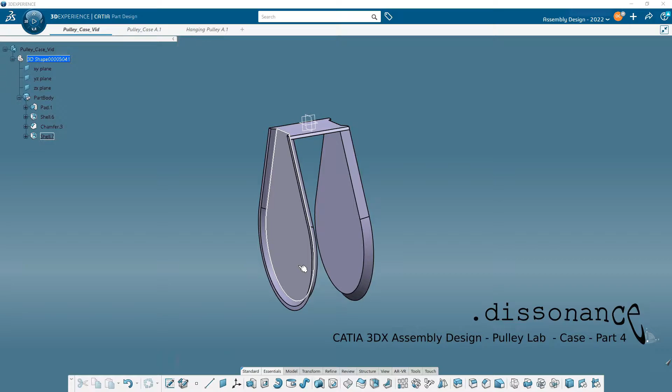So what I'm going to do next is add in our holes, and then I'll add the fillets afterwards. So I made mention of that over here when I was going through the tree. I made the fillets and I noticed it, and I was like, yeah, usually I put those at the end. The reason we usually do this is that you frequently have a lot of edges that you round over. Things in real life are not sharp.

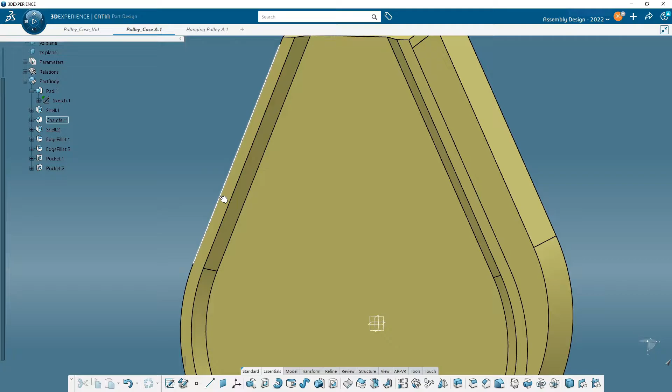So if I wanted to make this look a little bit more realistic, or if I was sending it to a 3D printer and it was a very sharp edge, maybe it wouldn't be so good. So you round over stuff. And because a part of a certain complexity is going to have a lot of different edges, you might end up with a lot of different fillets.

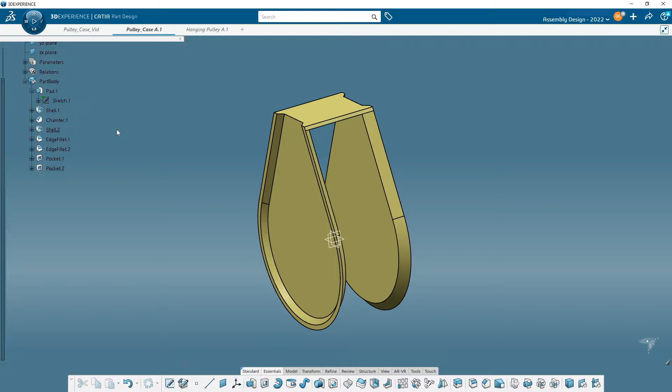And rather than have a pad and then a fillet and then a pocket and then a couple fillets and then something else and some fillets, it's a very common protocol to keep all your fillets towards the end as much as possible. So that's what I'm going to do. So the first thing is, how about we put a hole on the side? So how are we going to put a hole through here?

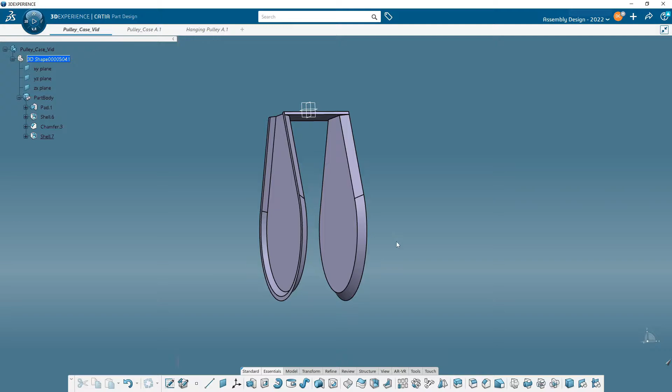I could quickly just go here, pick on this, go to Sketcher, draw a hole, and pocket it through everything. Now, it's probably fine, and I have almost no argument on you doing that. But then again, you could also do it on this face right here, and you could pocket up this way, and you could pocket up that way. You could put it over here. What I like to do is symmetry again. So I'm going to pick this and I'm going to go into Sketcher. And then I'm going to draw a circle here, and I'm going to extrude it both directions through, pocket it.

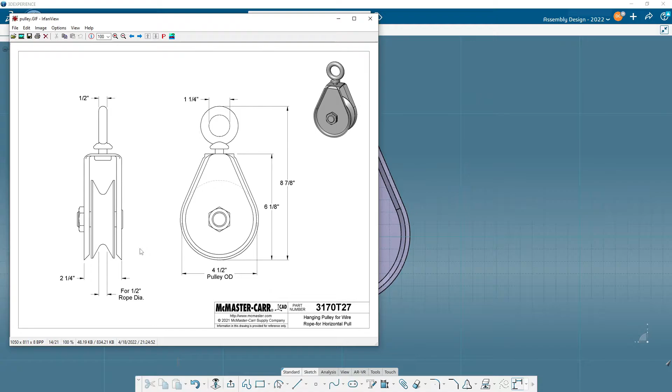So if I look at my drawing here, you can't see it. If you went to McMaster-Carr on this item number, there's another section where it shows the bolt that goes through here. It's a 3/4 of an inch bolt. Okay, so we're going to go ahead and add a 3/4 of an inch hole. I'm not worrying about tolerance issues, as in the hole maybe might need to be a little bit bigger or smaller. I'm not worried about that right now. It's a 3/4 of an inch bolt, so we're going with a 3/4 of an inch hole.

This right here, I want to flip this over that direction. So I got vertical up, horizontal to the right. I'll click on the background, and now I need to draw my circle. In order to draw the circle though, well, here's the thing. You could go over here and I could draw a circle. And then what I could do is bring this over and get this in the center somehow or another, right? Or I could get a center point first and I could draw this over the top. So let me show you what I mean.

This one right here, I want it right in the center of this circle. Remember how this shape got made? We had a construction circle, and then we drew the lines down here and ran around like so. Well, this actually has a center here. But it's not accessible to me right now. So what I want to do is I can pick either one of these here, because it's concentric. I can pick this and I project it.

So here we are doing projections again. I can project this forward, and if I click in the background, you see it's yellow, but it's a solid line. So that's a standard element. I don't want a standard element because that will mess up when I try to pocket it. So I want it to be a construction element. So I turn it on, so it's a dash, it's a guideline.

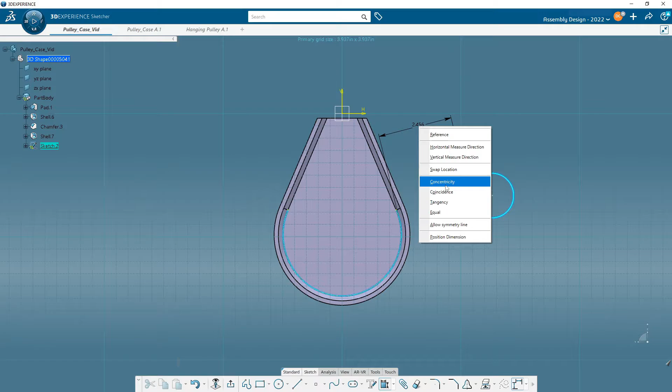It is aware of the two objects that you picked, and so it gives you more options depending upon what those things are. So I want to say it's concentric, so I click that, and it puts it right in the center. I think that that's probably a little bit easier. So I'm going to go with that, and then I'm going to dimension this to 3/4 of an inch.

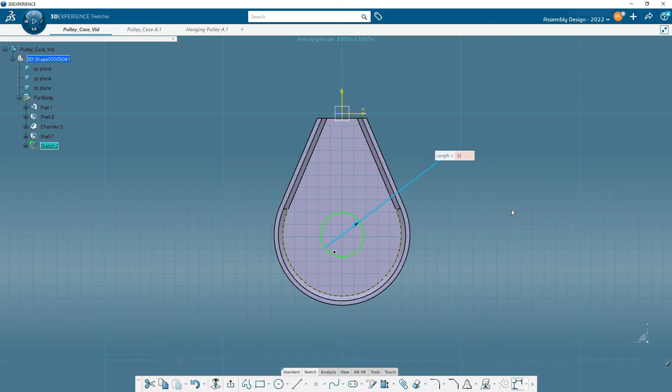So 3/4 of an inch is 0.75, but if you didn't know that, like if we had 47/64 or something, I could just go 3 divided by 4 and let it do the math for me, and I get 0.75, you see? So keep that all in mind.

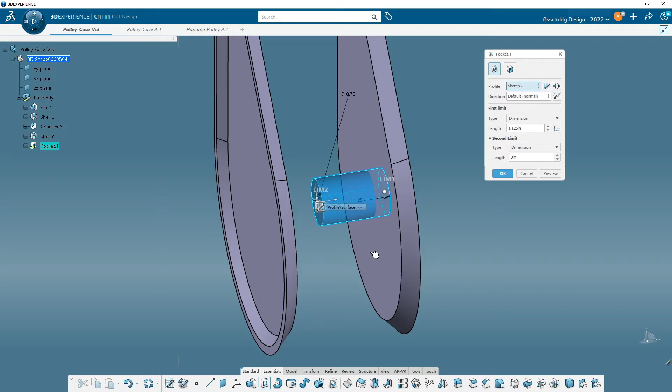Now I'll exit out of Sketcher, and we see that we have our circle right there in the center, and I'll hit Pocket, and it's going to go one direction, but I have a second limit as well. So we haven't used this one before. I've got first and second limit. It's going out a certain amount. It's going out 1.125. I could tell it to go out 2, but remember this from a long time ago that this is not the way to do this.

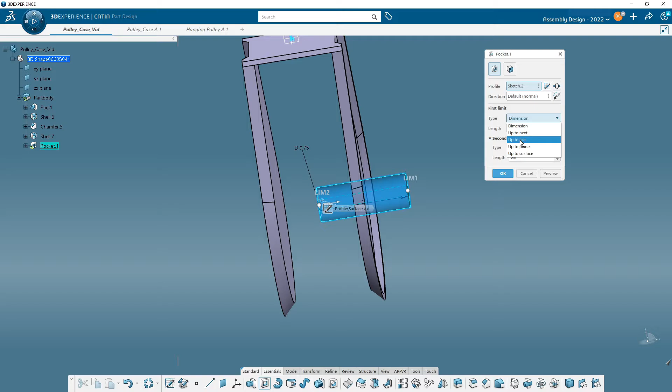You always want to use, whenever possible, the smartest one here. So I could say up to last, or up to next, or up to plane. So I'm going to say up to last, and it's going to go all the way through that part there. Now, what about the other side there?

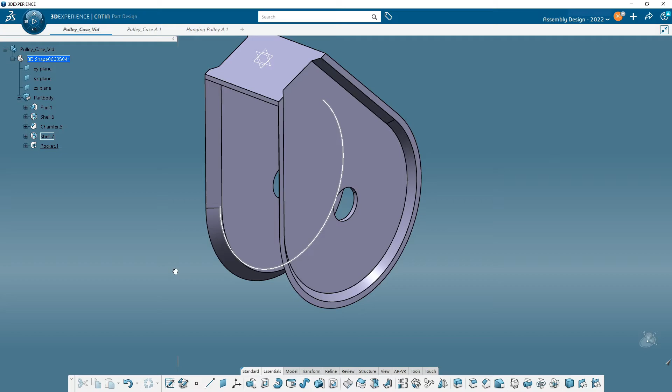Well, you might have thought that we have our symmetry options for this, but in this case, we have to use the up to last for the other direction, and it will go all the way through that way as well. So hit OK, and then we get our holes. So that's how we do that. I build things off of the center whenever possible, because center always seems to be the smarter move in case something else changes down the road, as I've been saying quite frequently.

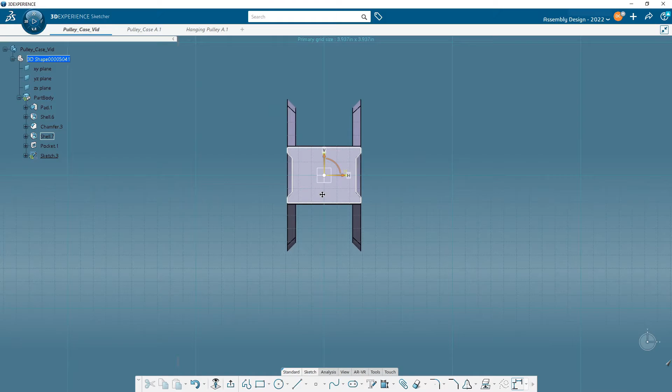So the next one to do is this one up here. So I can, in this case, pick this face, go into Sketcher. And now here's a tricky thing. This happens to be right smack in the center. And here, let's go ahead and click here. That was the right axis system. So I can put it right in the center, and I will.

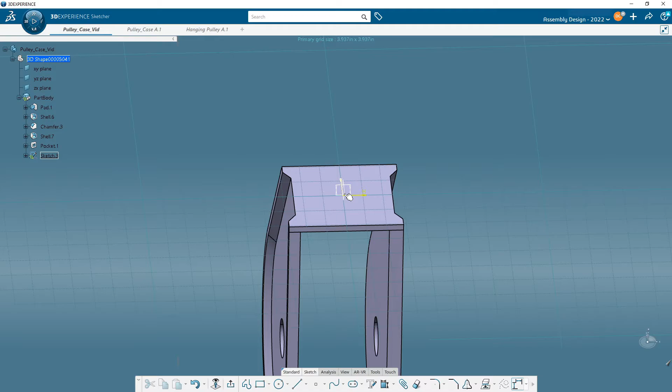It works okay. But just know that sometimes when you pick an object to go into Sketcher, you don't always end up with the sketch axes right smack in the center of the object. It was here because I designed this symmetrically and all the things I've been saying.

Sometimes what's even worse is it's slightly off and you don't realize it. So just know that if you actually need it in center, then all of a sudden we start doing more projections and construction lines, because I might project these edges. I could draw an X across here, and then I could add a point to the center. So keep it all in mind.

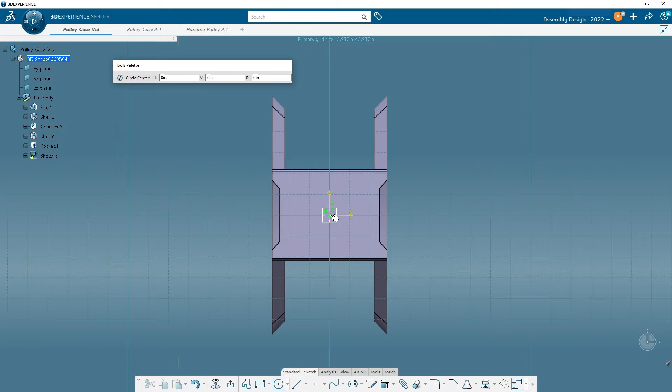So for this case, I'm going to hit a circle. I'll snap it right to the center right there. Click, bring this out. And how much are we going to do with this one? Well, this one here, there's no dimension on this, so I'm going to make it a half an inch. So I click Y. Why half an inch?

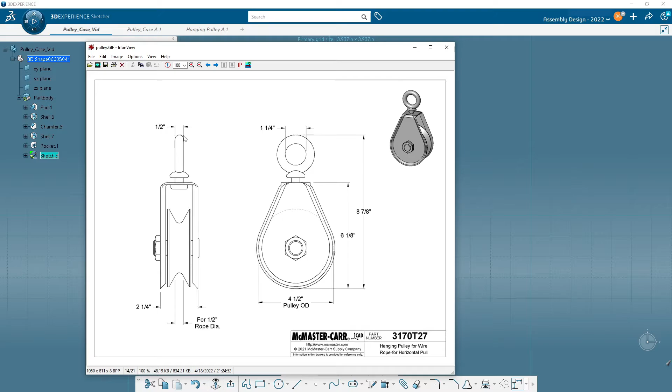Well, I was looking at this piece here. Again, no dimension. But if I look at this and I look at this right here, they kind of look like they're about the same. It might be an illusion, but it looked like it's about the same. So I went with half an inch. Exit out, and then pocket that up to last. Now let me mention something here.

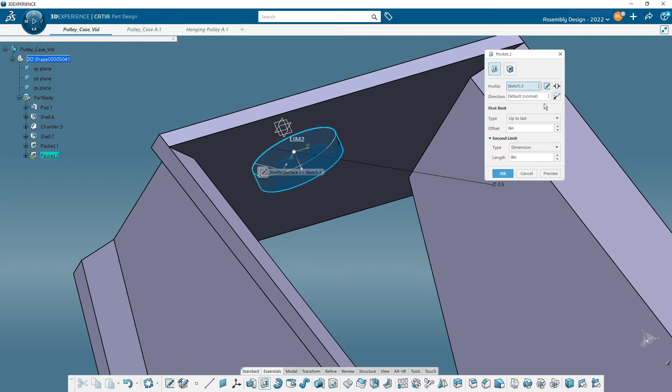You might be zoomed in here on a part like this, let's say, and you go, oh yeah, up to last, boom, and you hit OK. But what you don't notice is if there was another piece down here crossing this, that hole would go all the way through. It'd be empty air for a bit, but then it would go right through whatever was maybe hanging out down here.

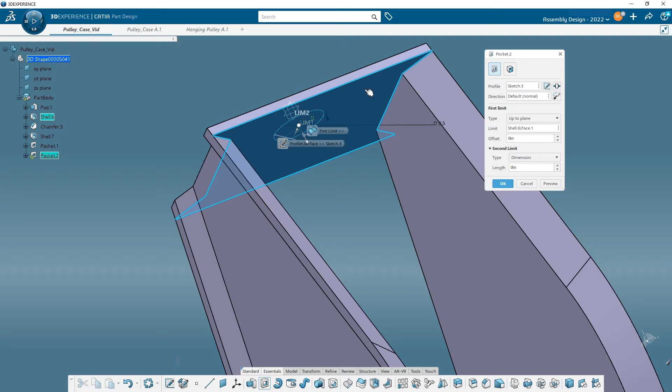So I thought I would just show you really quick that if you wanted to make sure that it didn't go all the way through something else that was down here, you could use up to next. I don't use that one so frequently, but what I do use is up to plane or up to surface. In this case, that right here is perfectly flat, so that's a plane. So I'll say up to plane, and then I'll pick that, and it will only go up to that plane right there. And if there was something down here, it wouldn't go through it. So just a little bit different way to use the tool.

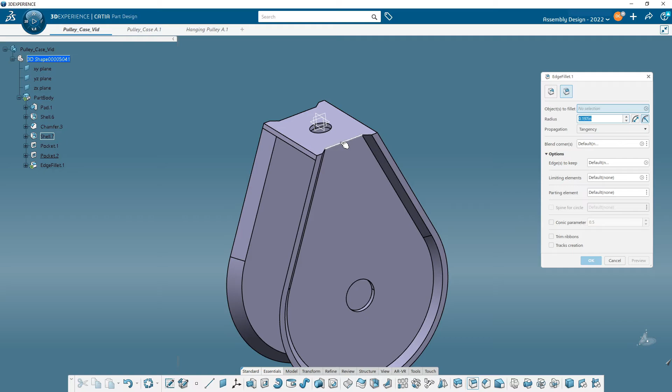So that's it for our holes. I think I'll go ahead and do the fillets, because that'll make a pretty darn short video if I separate those out. So our fillets, we're going to put one right here and right over here first. And this is a guess because there's nothing on there that tells me what it is. So I think 0.1 looks pretty all right. So I'm looking at this little shape there. So I got that fillet in there, maybe actually a little bit more, and then I want to round these corners off as well. And then we're done.

I'll hit this, and now see this, there's no propagation, so I have to pick that, I have to pick that, then I have to roll this around, and I have to pick that, and I have to pick that one right there. And 0.1, how about 0.25? That looks kind of okay. I don't know if that was there before. That might be too much, but you see where I'm going with this. Yeah, maybe we'll change that a little bit. Okay. 0.2. Yeah, good enough.

So, like I said, it's just cosmetic, and you could go through here and fiddle around with it a little bit more. I think maybe on the other ones, I probably put another fillet here because it kind of would be bent. But again, that part's just cosmetic, so I'll let you play around with that as you like. And as always, if you want to come over here and change the color, definitely do that. I'll just make it yellow just because, and we'll call that done.

Okay, so that is the pulley case complete. So save this one, and then the next one we'll go after is probably going to be maybe we'll model that upper piece here, or the nuts and bolts.